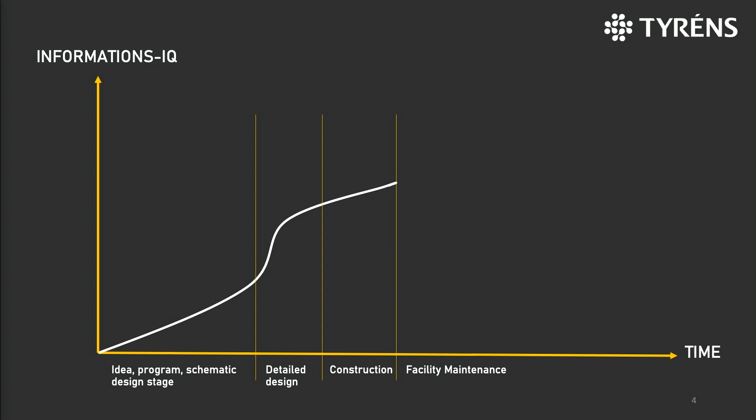I want to start here because this is my experience from all the projects I've been working with. On the y-axis, you have the information intelligence, or the volume of information. And during the design phase, you add on information. Your 3D models get more and more detailed. In your construction phase, you get all the operation documentation, you have Excel sheets, you have databases, and all of this stuff. And what happens when you hand over the project?

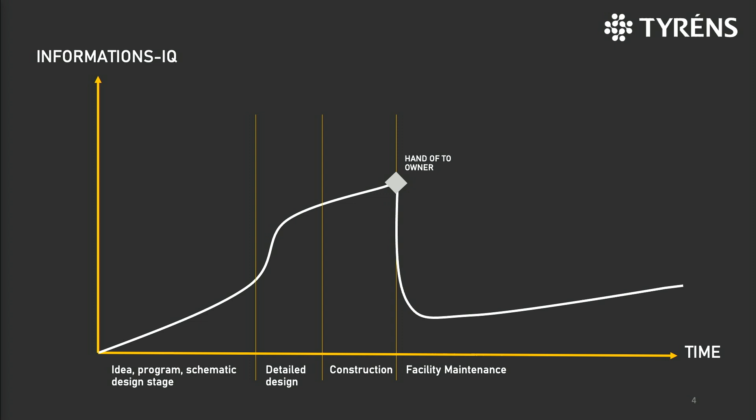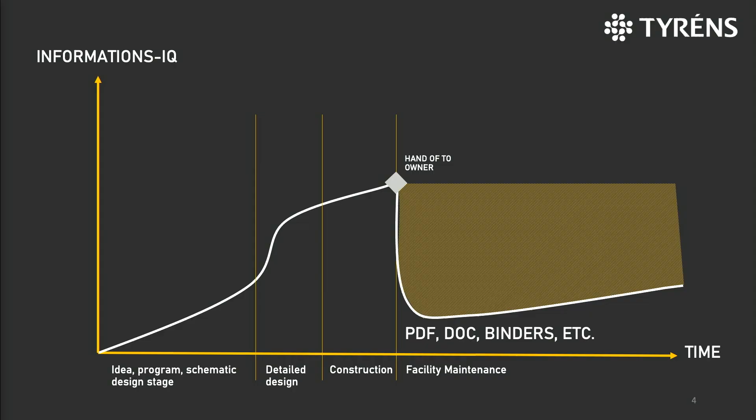Of course, the information intelligence goes down. You take these nice 3D models, you flatten them out, you send in DWG documents and PDFs and stuff like that. You even print out binders with all the operation documentation during this phase. So here we have a big field of opportunity. I call it the digital property assets, the owner's digital property.

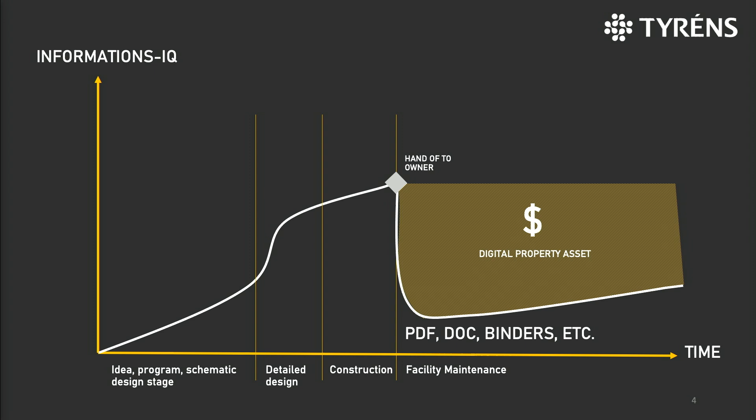And if we can actually take care of all this information, I think we can also use these AI tools and so on to develop the information upon that data, to create new services, to create new data-driven decisions, etc. And that's what we want for our customer, to get value from this intelligent information.

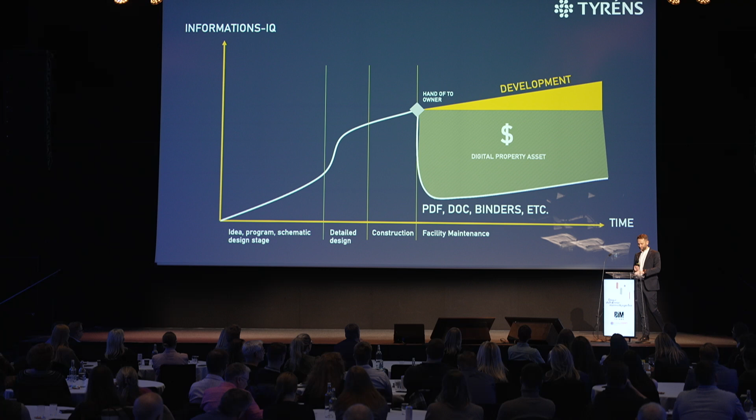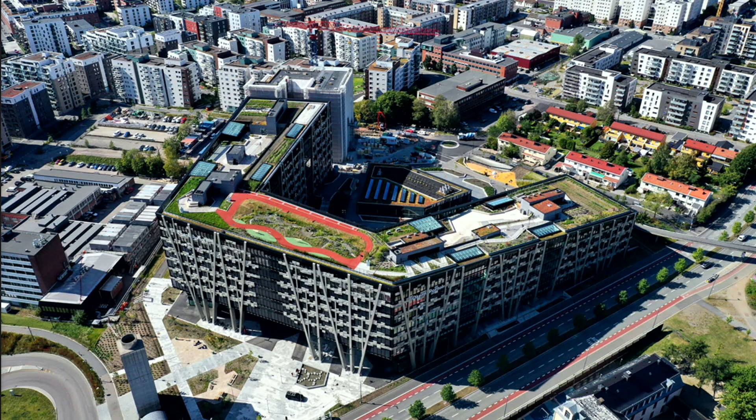So today, I will talk about this project. It's called Portal. It's a big office building, mostly, but also a hotel complex just beside, where Radisson Red is now the hotel manager. And the Portal is, as it says, a portal to this residential area, where all the people can come through the portal and into this area where we have restaurants, stores, etc.

And from the beginning, the property owner, OPF, Oslo Pensjonsforsikring, it's like a pension fund, they own this building. They wanted to have a high-end goal on the digital level, but also, of course, sustainable goals. And here it is, just 10 minutes by subway outside Oslo city center. But today I would say the Økern Portal is perhaps more known as a sustainable project.

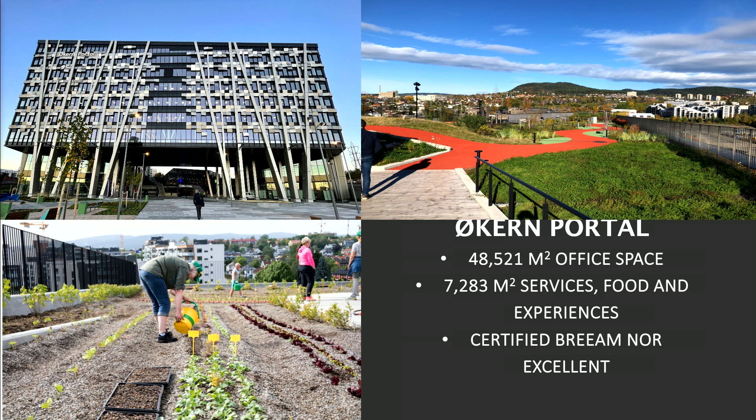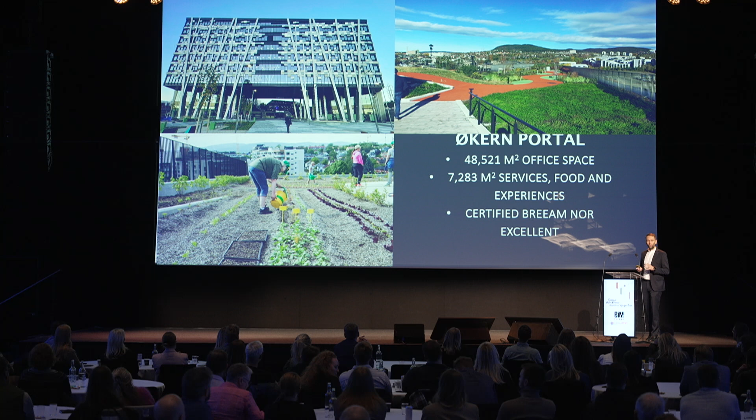The facade is made of recycled aluminum. We have all the vegetables and stuff that are actually cropped on the roof. So the restaurant in the building will use these crops and vegetables in their daily lunch menu, for example. It's about 48,000 square meters of office space and 7,000 square meters of restaurant and services. Of course, it's certified BREEAM NOR Excellent, which is a very high level of sustainability.

But on the digital side, we started with this commercial, actually, because they wanted to create a commercial that attracts new tenants to this project. And the commercial is about Maria. She's taken her bike to the office building, and she gets a notification on her cell phone that she can leave her bike for a service. And all during the day, she meets different types of notifications.

She can book her conference room. She can scroll through different food alternatives for lunch, etc. So this was a commercial that they wanted to attract different tenants to this project. And from this movie, you can say, we started to map out a digital goal for this project. We wanted to create this digital twin, a fully digitized building that enables different things.

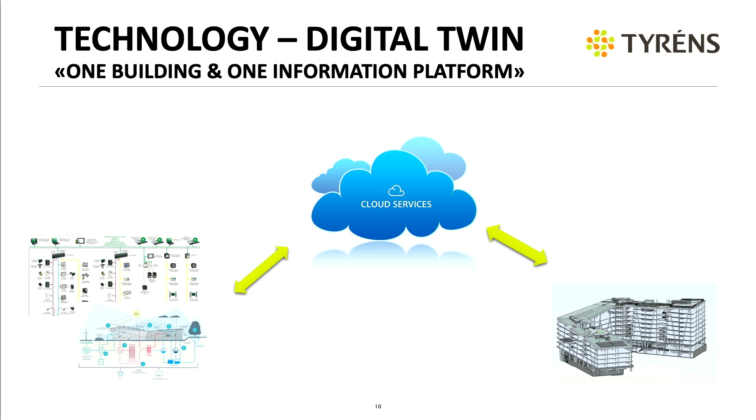We wanted the BMS system, the building management system, to integrate with this platform. We wanted the 3D model, the BIM model, to interact with this platform. We came up with a solution using BIM 360 for these 3D models, Revit models, and Autodesk Forge as an API to integrate to this platform. We also looked into different ERP systems and building management systems to fetch and give data to this platform, and third-party apps.

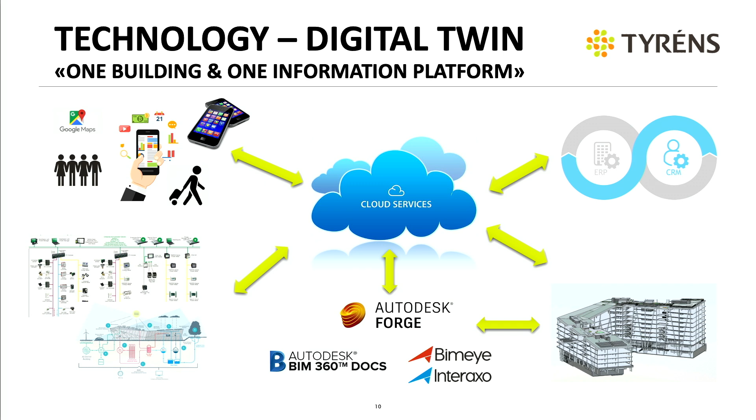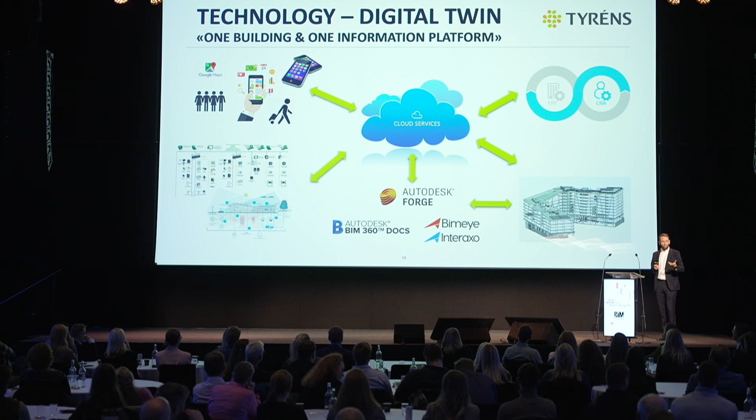We have 4Service, who is the restaurant entrepreneur in the building. They also have an app for all the tenants that you can order lunch through, and so on. So: one building, one platform.

Okay, where do we start? We started by mapping out different functions, different data sets, different information. It's not my intention that you read all this - it's just that we needed to break down all the apps, all the applications, into the different information setups that we needed.

We looked at what data comes from the BMS system, what comes from the IVMS system, what's personal data, user ID and stuff like that, asset data, but also BIM data. This Excel spreadsheet is very large and long. And now, during the years - this is an ongoing project - it's both a building site during these years, but it's also a digital working place.

A couple of years later, we have all these vendors and suppliers that bought into this project. We have Niagara for the BMS system, Apcoa controlling the parking spaces, 4Service the restaurant owner, and stuff like that. On the BIM side, we have Autodesk Forge, BIM 360, and Bimeye and Interaxo from Tribia. This cloud became a map of all these different types of information and different suppliers around this platform we wanted to build.

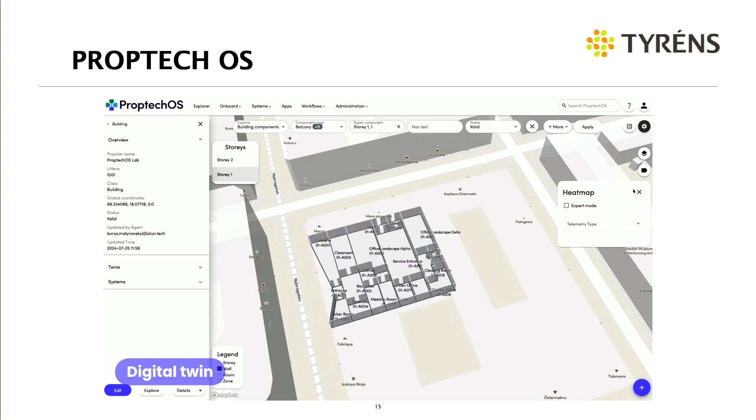And with our marketplace, you have access to an extensive range of apps, ready to integrate and enhance your building's intelligence.

So in PropTech OS, we collect all this data, as I described before. This is just a picture from the UX, and I can show you later on if you want to. We can have a coffee afterwards.

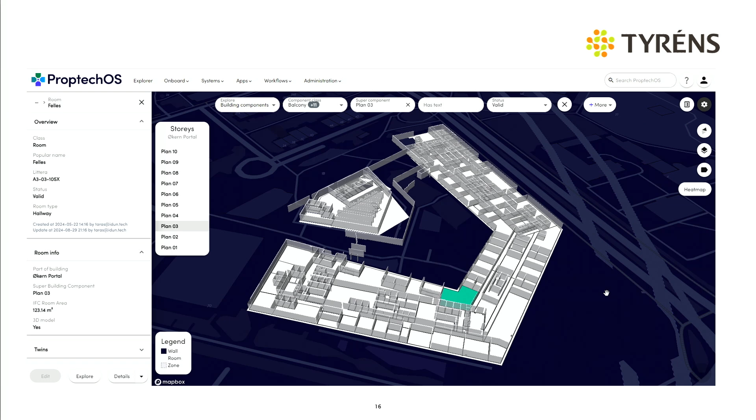One more thing I would like to point out in this project. This was one big thing, I think, and what I wanted to show you. But one other thing we have made possible is, I think it was Sten talking about it before, that was the operation and maintenance documentation.

Back in 2018, our project manager, Bernhard, came to the meeting with a plastic bag, and it poured out the plastic bag on the table. And what was it? It was USB sticks, CDs, and even floppy disks. And he said to me and my colleagues, this is my building information, this is what I get when I get a property. As my graph showed before, this is quite normal, that you get all the building documentation into one USB stick. So back in 2018, we said we need to do something different.

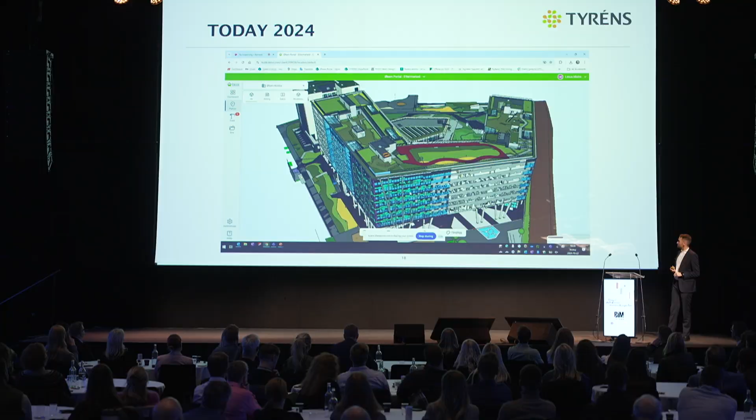So we did. This is just an example. I have used Dalux viewer, BIM viewer, because it's fast. But you can use any IFC viewer you want.

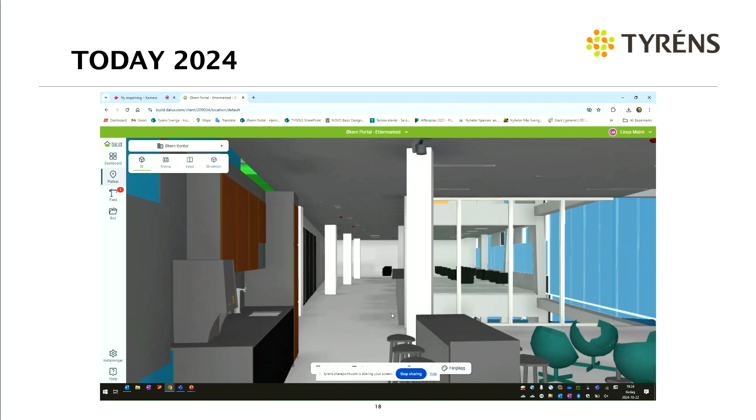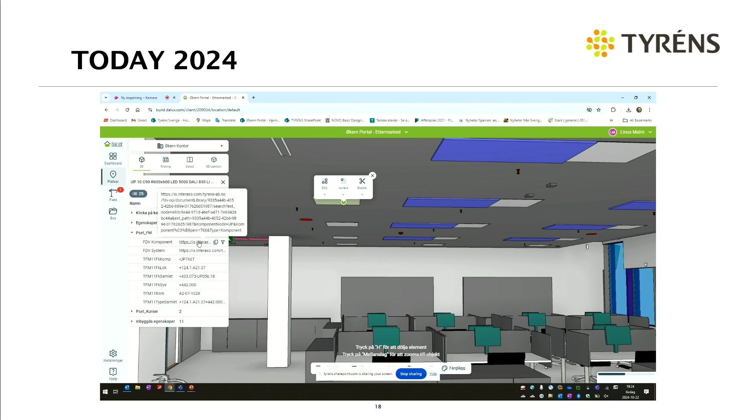Going into the building, you can of course get around, you can hide and seek different components. But in this example, I will just click on, I think it's a lamp. And as you can see here, we have different component coding for different components and also systems. You just click on that component, log into Tribia Interaxo, and you will get all the documentation you need for that specific product.

So in this system, we have this as an operation documentation gathering system, you can say. And you can just click and you get all the information you need about that lamp. So we created this connection between the BIM model and the operation documentation.

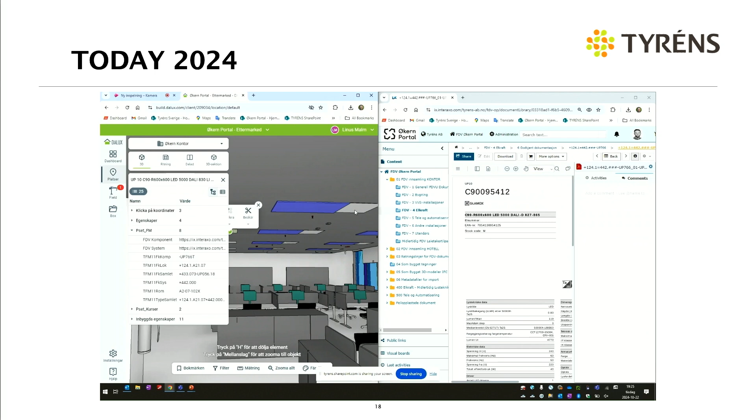Yeah, I just click on another component, same procedure. I can fastly look into that component and look at the product data. Just like that. So this system is used by the facility manager at the project today.

So, what are my learnings? I will say you should start with this target image or your goals for your project. It's very crucial. Anchor this with the top level management. We wouldn't be here today in this project if it hadn't been for Richard Groven, who is the managing director for OPF Eiendom in Norway.

And make sure you have your requirements from the start. We didn't. There's been a lot of meetings regarding, was this demanded from the beginning? Wasn't it? Is this demanded from the beginning? And so on and so on. So please, as we heard today also, start with the IDS. Start with it now, and make sure you get the right demands from the beginning.

Make sure your technical system, if you're a property owner in the room and you want to have this smart building, make sure your system that you buy can talk both ways. This is also a problem we had during the project. For example, the solar blinds weren't talkable, so to say. So the only thing we could see was it down or was it up? We couldn't see if it stopped or if it was an error, and we couldn't even override if we wanted to go up or go down. So make sure your systems talk both ways.